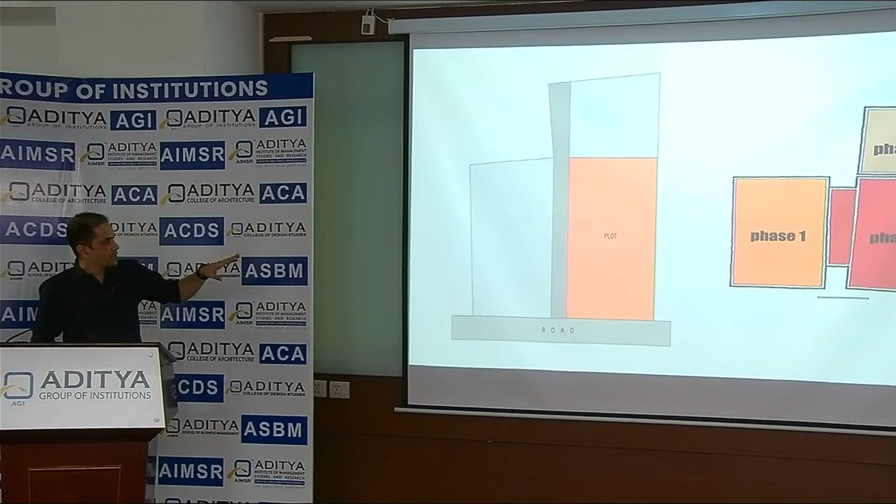This was a project initiated by the Chief Minister of Goa, Mr. Parrikar. There was an existing market, and his idea was to demolish it and build a proper market with proper infrastructure and more space to expand. If you see on the left, the orange rectangle was the plot where the existing market was, and he wanted to give them almost 30% extra space for future expansion.

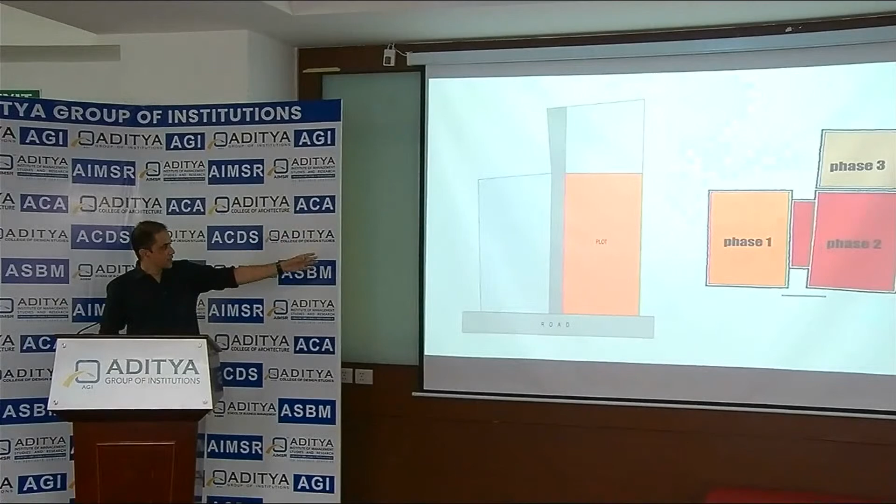So they decided to take up the plot which was on the left, in gray, and also take up the lane which was separating those two plots, as well as the plot behind.

The initial idea was to build the market in three phases. Phase one was built on the left so the existing market wasn't disturbed. Then the plan was to shift vendors into the new market, demolish the old one, and build phase two. Phase three was for fish and meat, while the first two were for vegetables and other things. It seemed like a good plan, and considering I was getting twice the amount of space, I thought it could be a nice market with good spaces.

But when we did the vendor count, we realized there were a lot of people who had been setting up shops in the corridors outside the market—it was like a slum. So everybody had to be given proper space; it wasn't just shops being transferred, it was people all over. Once you start giving them proper space of a minimum size, they started occupying a lot more than what they were occupying in the existing market.

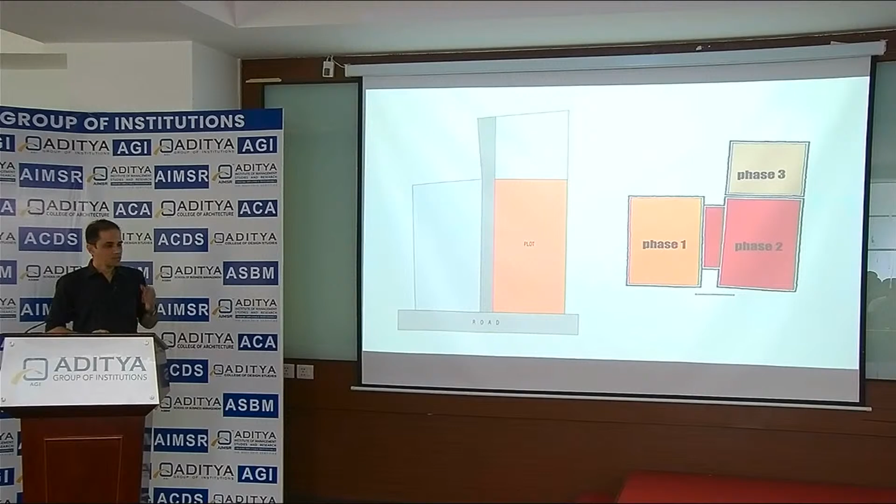So my initial thought of having just a ground story structure with courtyards, since this was supposed to be a vegetable market, I realized was not possible. We had to consume the entire plot for the building—there was no way to have pockets in between. Not only that, I had to go one story above, which was the worst thing for a vegetable market. There was no way to avoid the first floor. So all those initial thoughts of a nice low story structure with courtyards and sloping roofs were not possible.

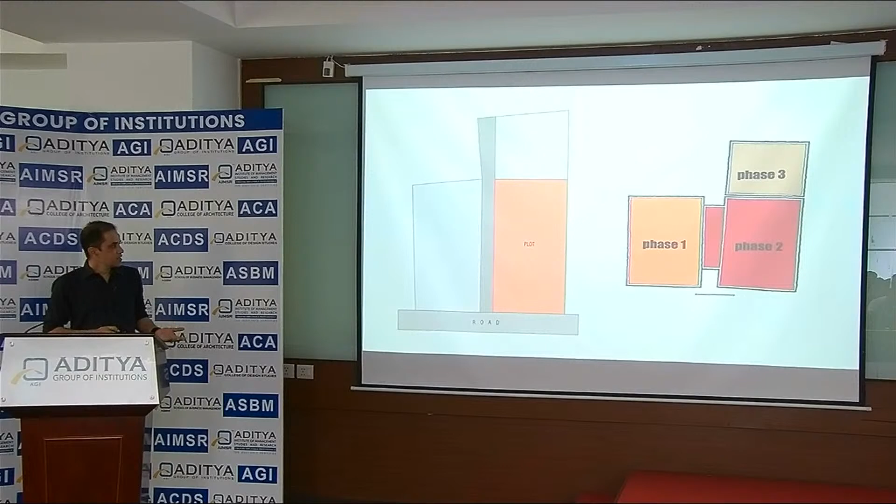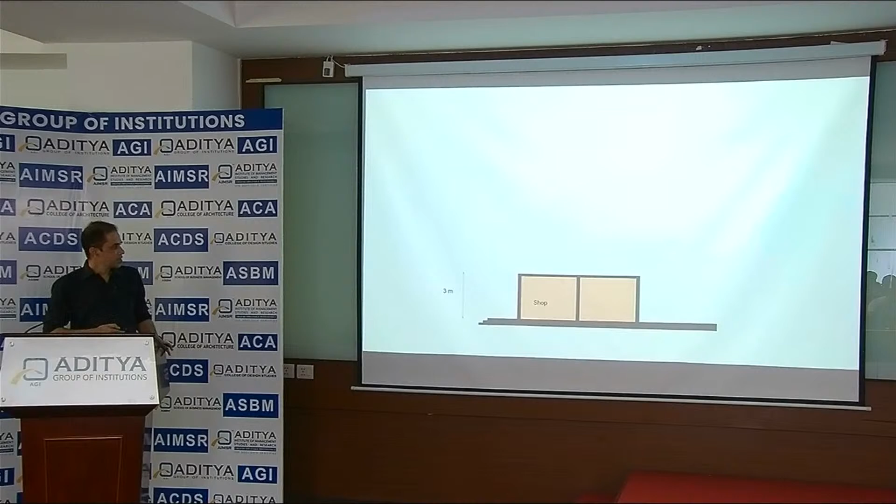Then came the second problem. These were the existing shops which had 3 meters height, and we had to give them exactly the same size. But they also had a mezzanine floor, another 2.5 meters. Which means my first floor was going to be 5.5 to 6 meters above the plinth level, meaning they had to climb up two floors to reach the first floor.

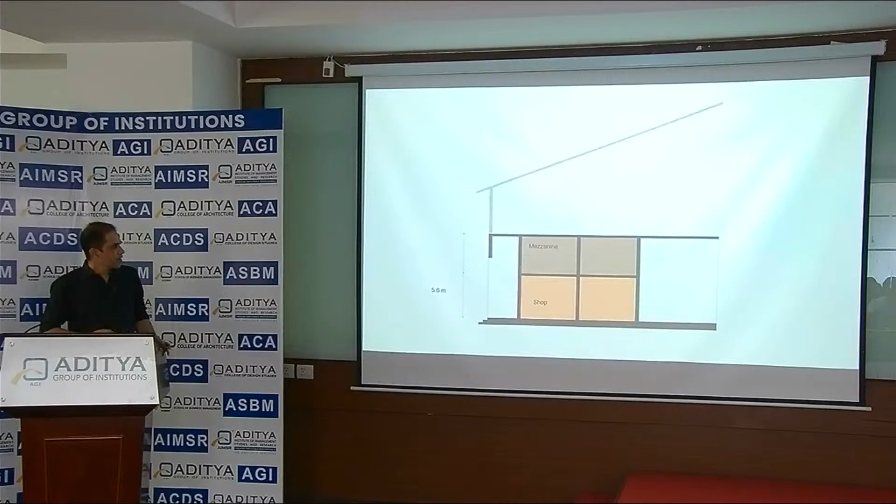It was not just 3 meters, they had to climb almost 6 meters to go up. So who would really climb up? There were no escalators, nothing. So I was sure this was going to fail. And if you see from outside, even adding 3 meters for the first floor, my frontage would have been like 9 meters before the roof starts—the eaves bottom would be around 9 meters, meaning it was a huge building.

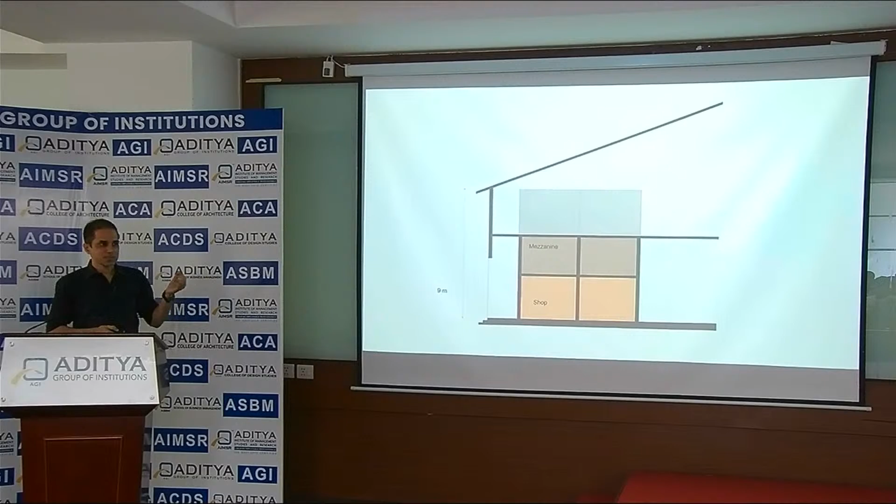It was like a monster building with a giant roof in the middle of Panjim city. So the first thing was how to bring the first floor down, how to connect the ground and first floor. That was the first issue, resolved this way: after the mezzanine floor, we dropped the slab by about 2 to 2.5 feet, giving us 3 or 4 steps, and then raised the ground floor as you enter to a certain level, almost midway, so the difference between ground and first floor became only 3.6 meters—so at least you feel you're climbing only one floor.

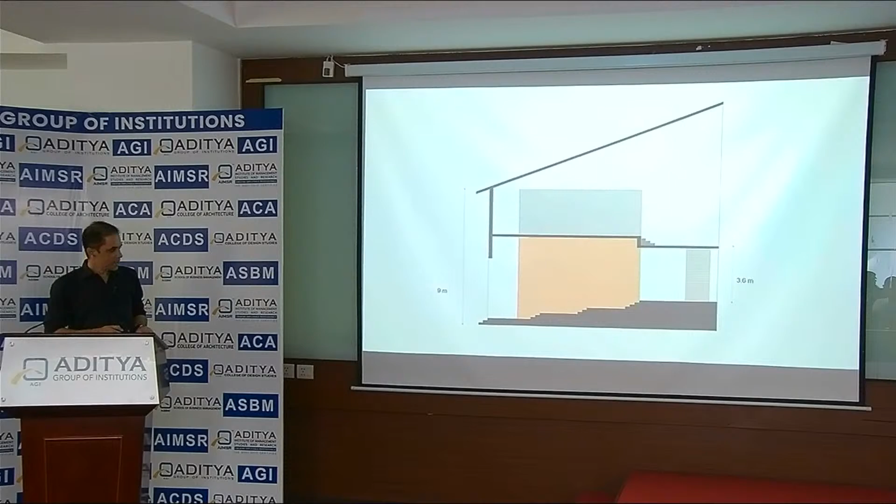This is how we solved that first problem of level difference, which was almost like two floors—solved in the section. This is how the plan looks now, because we had to leave a lot of setback space for trucks to move around for loading and unloading. There were other services like generators on one side, and the fire engine had to be able to go all around.

So the footprint was reducing considerably, and I had to use the entire footprint to fit in all the shops and the platforms. What you see in orange are the shops kept along the edge, and the central portion is where the open platforms are, where they sell vegetables.

The people on the first floor were not really connected with selling vegetables - they were selling plastic, or were tailors, or selling books, all kinds of people. They were shifted to the first floor so that all the perishable goods were kept on the ground floor, making it easy to unload and remove them. So this is how it was done.

Also, there was a road in between which acted like a shortcut for people from the city to go to the edge of the city to catch the bus to other places. It was like how people get down at the station, come out, buy vegetables, and go home - it was something like that for them.

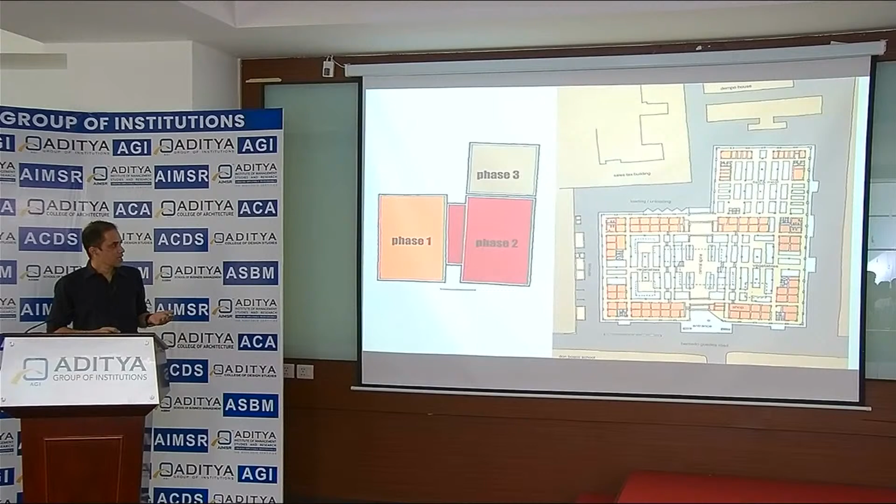And the rest of the building is very simple. It's just a grid of 6.5 meters by 6.5 meters, which was the most economical grid for a metal truss, used to cover the whole building.

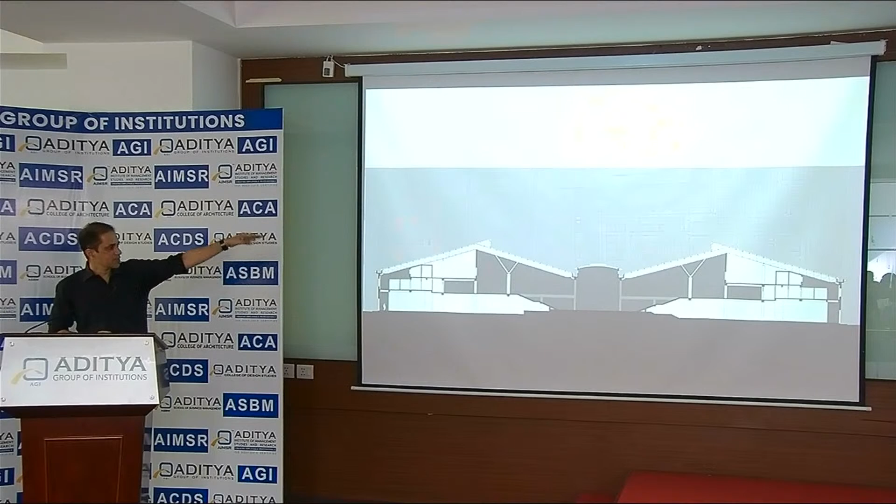This is how it looks in section - that's the central aisle where we have a skylight so that you feel like you're walking in the open. This is the building, this is phase one, and that's phase two, and that's the staircase which connects, just climbing up 3.6 meters.

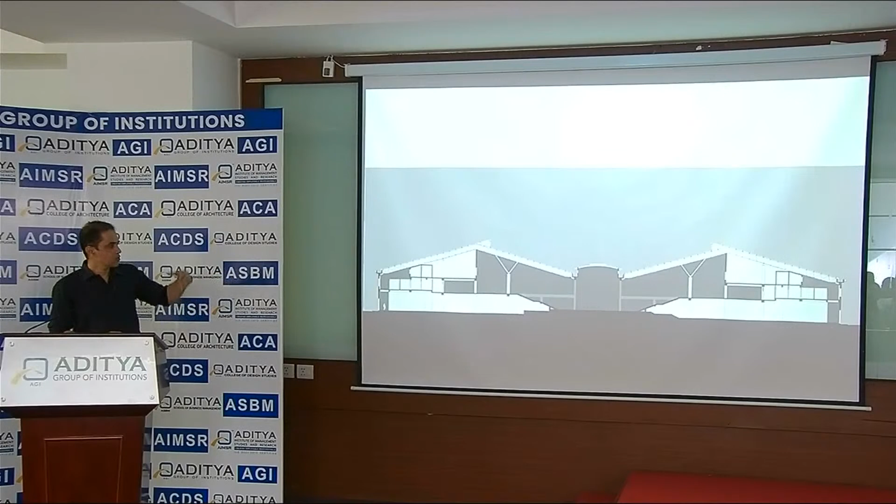The first floor was kept sort of behind - it's not occupying the entire ground floor, so there's a lot of open space, and you can actually see what's happening upstairs as well as downstairs by standing in the middle aisle.

So the section turned out to be very nice because of something we tried to resolve - the problem of the shops and the mezzanine floor.

The second thing was, coming back to scale - the building was 9 meters in height from outside before the sloping roof started. So I wanted to bring the scale of ground plus one, if not physically, at least visually.

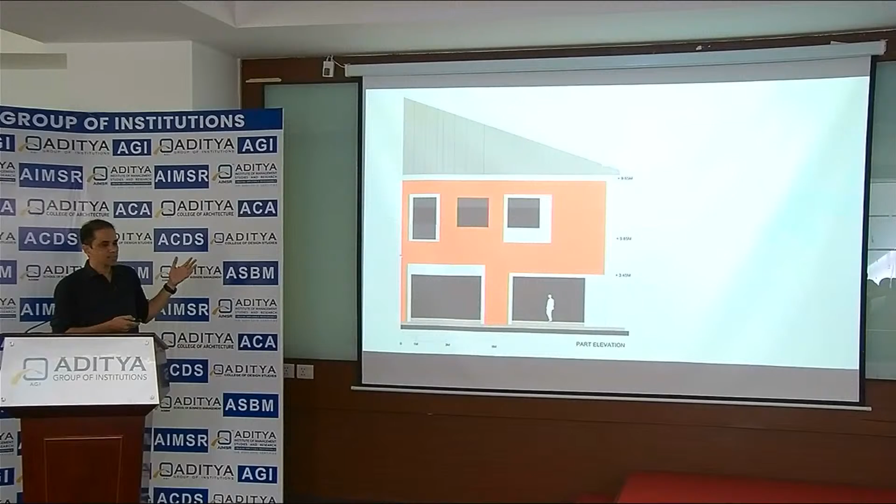So by putting that border, fatter on the bottom, it helped in reducing the gap between the openings. That played a major role in this elevation, and also made the building look a little different, in the sense that some variety is happening, even though the openings are very standard and straightforward, just in one row, not going up and down. But the border helped in creating some interesting element on the facade.

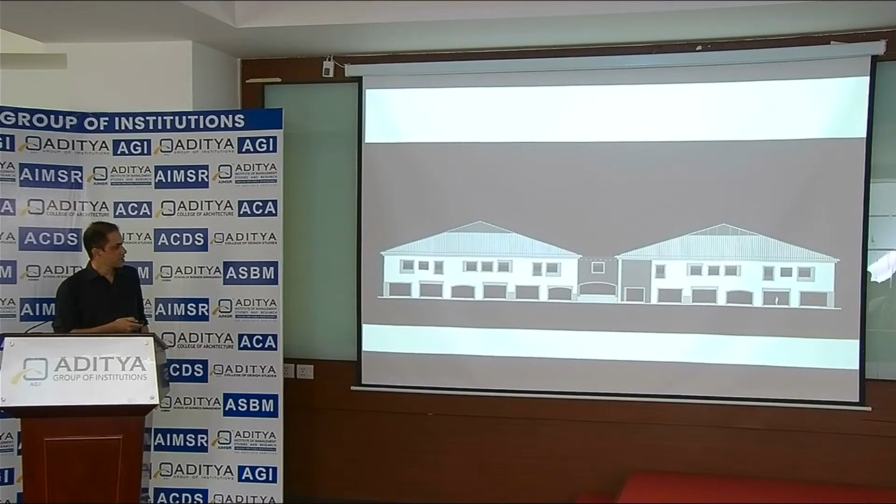So this is how the buildings look. That's the ground, that's phase one, and this is phase two. I also created a gap so it looked like two separate buildings. The central portion is the aisle you take to enter the market, also used as a shortcut. These openings look as if they're going up and down, whereas they're all in a straight line—it's just the border doing that. We also painted them in two different colors so they look like two separate buildings. And this is how the building looks now that it's built.

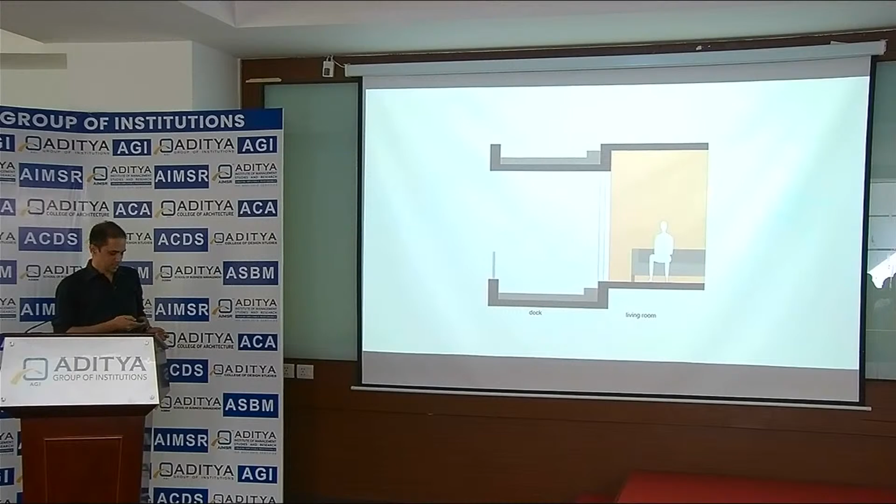Even for the bedrooms, we had a sort of planter outside so that people don't keep things outside, and we had drip irrigation for all these plants. I wanted all the plants to have white flowers at that time, and now it's no longer there—initially we started with white flowers, but then people have changed, and some of the plants have died. These are some things which we don't have control upon.

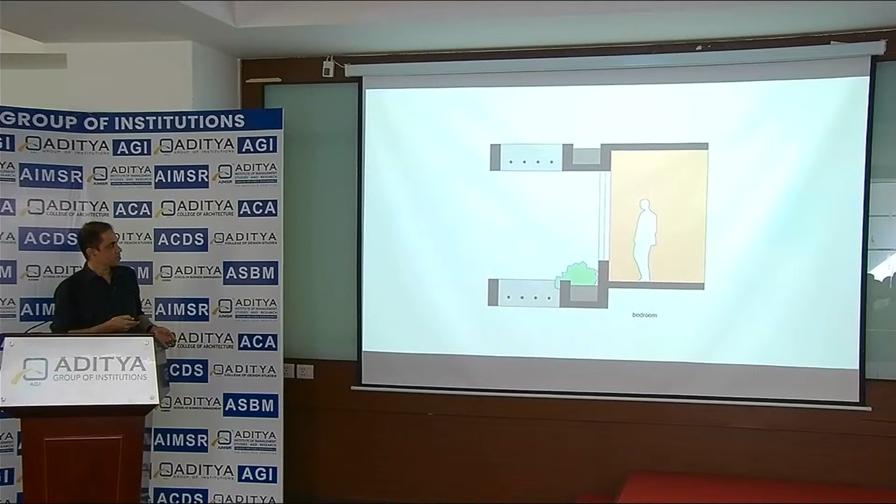The buildings were also kept at an angle so they have a better view of the sea, and that was the best part on top.

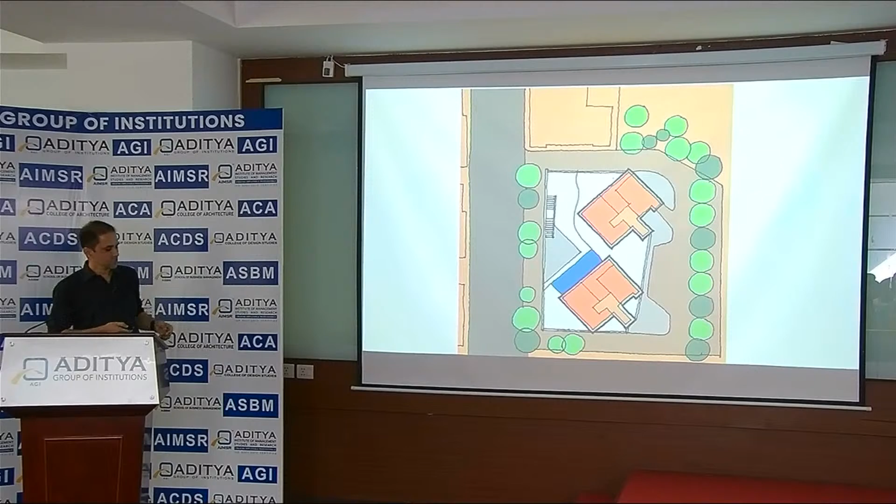This was one of our first projects, so we were really excited. We designed the brochure and everything for them free of charge. At that time they were all hand-drawn drawings, and that's the view you can see from the building.

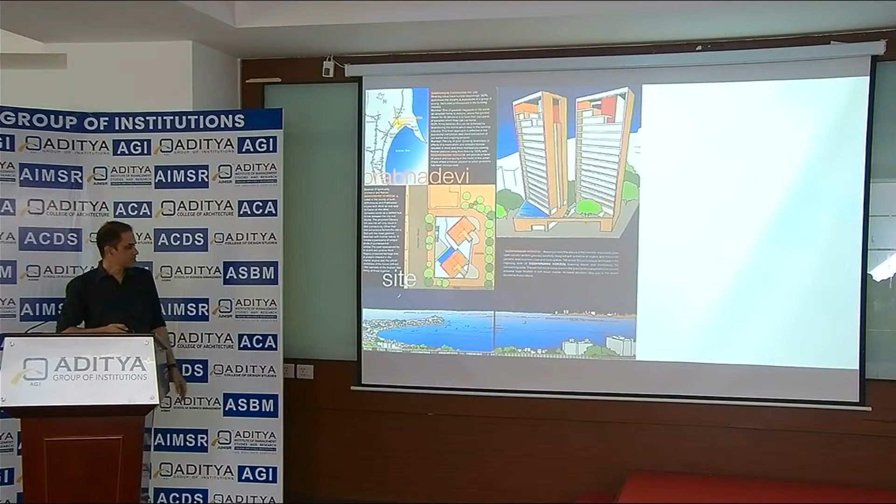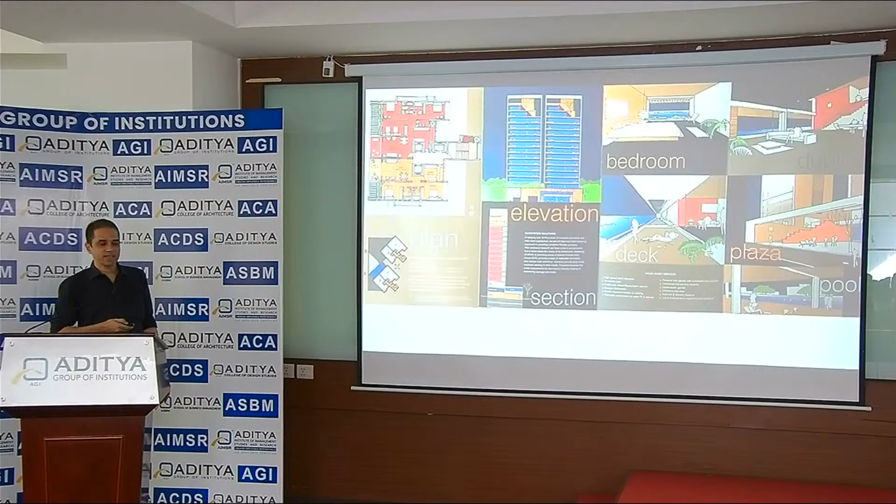The brochure was quite liked by people, so they had to print it multiple times because people just came and took away the brochure, and nobody bought the flat.

This is the building elevation when it was built. This is how it looks.

Now, what is important is I realized that when you're walking on the street, you cannot see a high-rise building because you never look up. What you see is at eye level, so that's just the first 3 or 4 floors, and there are also trees sometimes which block your vision. So high-rise buildings are not really seen when you're walking on the street. Only architects look up, I suppose, so the rest of the people just look down.

And in such cases, most of the bottom levels are used for parking. So you have 5 or 6 levels of parking, and all you see is just blank walls or screens, which again doesn't go well with the street, the context or the scale of the street. So I was very clear that it is important that we should have something at the lower level that tells you there are human beings staying here and they're not just cars. So the whole focus was on what is to be done at the podium level.

Fortunately for me, there were some existing shops which had to be given back, so we placed them along the street, and we also created terraces so there's some interesting level difference. You see some staircases going up, and people moving up and down. There's an arcade, there's like a little courtyard. So all this was happening at street level, which you notice, and you don't notice the building above. This I thought was very important, keeping in mind what happens on the street, what happens to the people walking on the street.

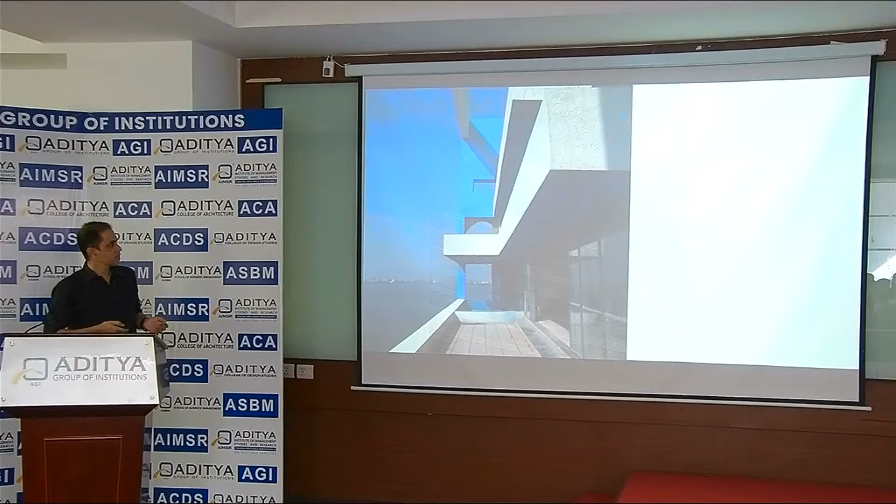Similarly, the penthouses on top were made to look like bungalows, or feel like bungalows, because of the terraces created upstairs. So the top floor was all penthouses, and that's how the building looks from far.

And those are the buildings over there. This was built in 2004 or 5, and they were quite tall at that time. But nowadays, probably there are much taller buildings all around, 40-story buildings all around. But at that time these were considered quite tall.

The third project is actually a small building compared to this. It was just a lab-cum-office space for a cement factory, and these people were producing something called microfine cement, which is used for bridges and all that. It was the first of its kind during that time. So they wanted buyers to come to their factory and understand what is microfine cement. They were expecting to export this, so they were expecting a lot of people from abroad to come here.

This entire factory was built by the engineers, and there was no need for an architect here. They had this tiny plot right in front, which of course they were going to design. Then somebody thought, okay, we should hire an architect to do this small building because we are expecting people from outside and it can't look like this. So they called me.

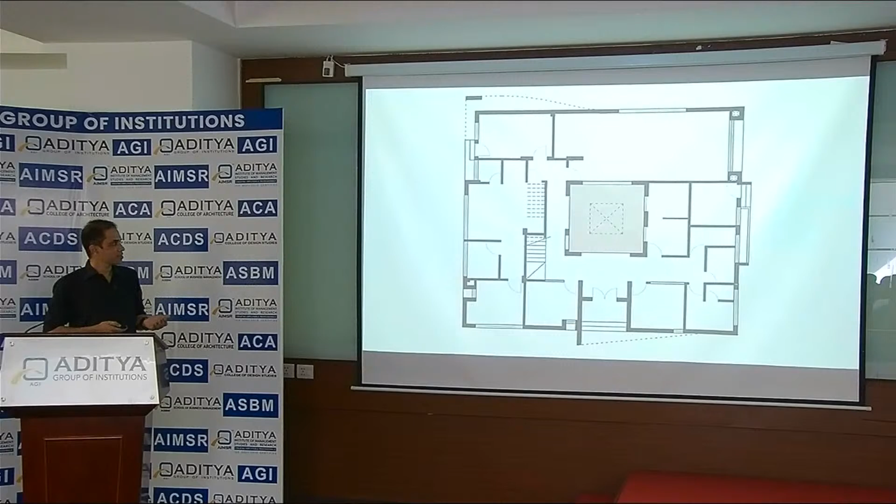I looked around and saw that everything was gray and looking like a factory, filled with cement powder. So what we really needed was something that would stand out in this whole thing and grab your attention. If you see the requirements, there were hardly any - just a lab and a few office spaces and cabins. It was a very small building, and there was no way we could have a courtyard inside because there's a lot of dust flying around. So this is an enclosed space, like a small pocket in the center, but it has a skylight on top, and everything revolves around it.

I decided this building cannot remain a ground story building, because though I love ground story structures and every time the attempt is to keep the height low, this was a time when I thought it needs to be pulled up. The reason was that if you see the surroundings, there are all those sheds and things happening around that are much higher. So we thought it should be at least in line with the shed next to it, so it sort of has a presence, which was what they were looking for.

In order to do that, we had to place a few requirements on the first floor and even on the second floor, like the conference room was kept on the second floor at the back. The water tank came right at the corner as per Vastu, because that was the place it had to be kept, so it was brought to the front. And in this case, the building had to look sculptural, because everything else was pretty straightforward.

I thought this should look like some sort of a jewel in the whole thing, and it should be painted red so that it brings in some light in this surrounding. So it was a little red building placed there, and it has windows, but they're not one above the other because that would give away the height of the building. So they are staggered or indirect, so you don't realize the total height of the building or how many floors there are when you see it.

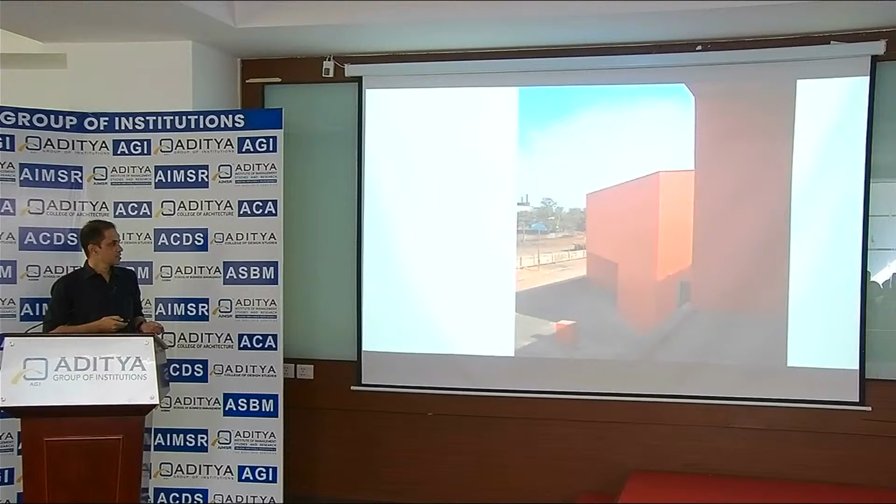The next project is Mustifund School in Goa. It's basically a school, and the government had suddenly decided there's too much congestion in the city, and we should shift all the schools outside, on the outskirts, which is not very far, just 4 kilometers. They gave plots to 5 schools who did not have a proper space in the city, no proper playground, for a very nominal charge, and the schools had no choice but to shift.

But the plot they gave them was something like 50 meters by 200 meters, and the level difference is like 21 meters, which is like a 7 story building. This could have been the worst plot for any school, because how are you going to have a playground? The slope is 1:4, which is quite steep. But they had no choice, and this was the only piece of land available on the outskirts, so they all agreed to go for it.

Initially I thought it would be difficult, but then we came up with a solution, and now I'm thankful they gave this plot with such a steep slope because it really helped us in designing the building.

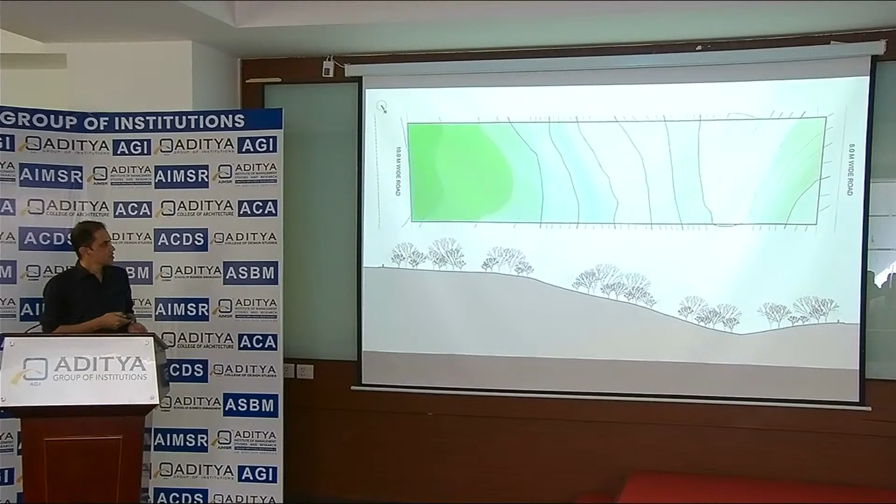This was the plot when I went to see it. It was like a jungle, and you could hardly go a few meters inside. So we relied upon the contour survey which was given to us.

When children go to school, usually they start at the age of 4. They're very small, and that's the first time they're stepping out of their houses all alone, and they're really scared. Most of our school buildings, especially in Bombay, are like huge buildings, so they're very intimidating for the child, and they don't really like where they're going.

So we started off with the size of a classroom, and since the school had to build this building on their own with no help from the government, they were all depending on donations and things like that.

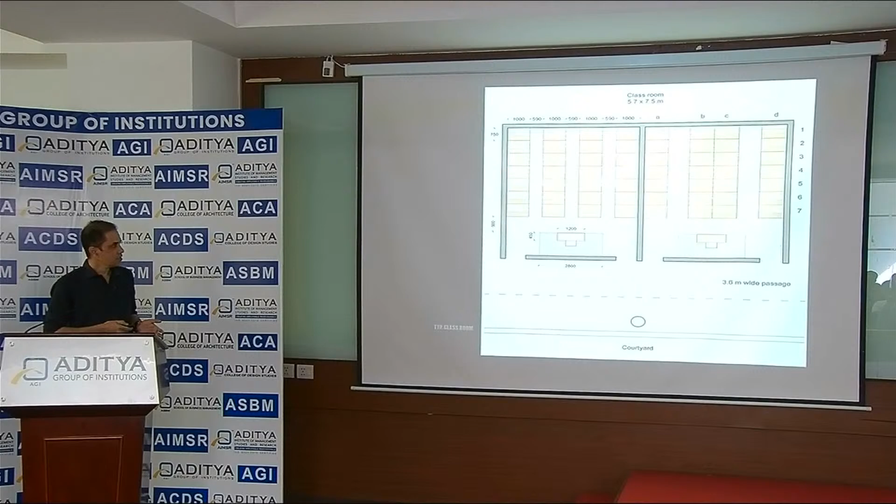So the classroom was designed first. Then the classrooms are placed around the courtyard. Considering that we had only 50 meters width and leaving 6 meters on both sides, whatever was remaining in between was used as the width of the building. After placing the classrooms, we took the corridor as wide as possible, and then we got the size of a courtyard, around 16 by 14 meters, which is ideal for a ground plus one structure. That was the minimum size of the courtyard I wanted, and we could get it.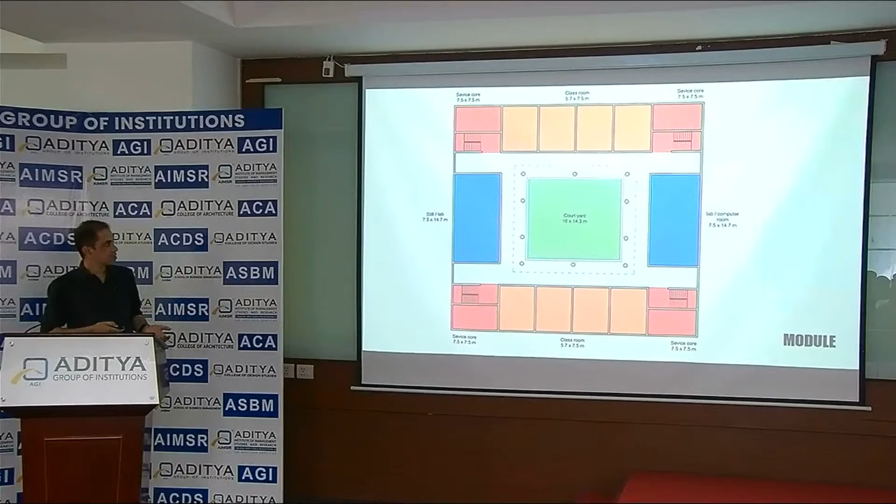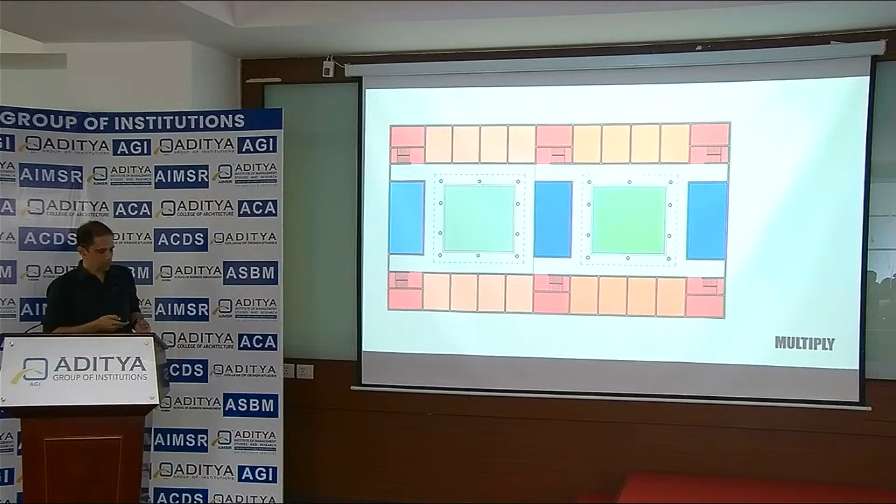Then this is how I could multiply it, and you realize that the in-between part is overlapping - the red portion and the blue and again the red, they are overlapping. So if this was the first module, the first courtyard, the second one was overlapping so that the staircases connect and you can walk down to the next courtyard, next level, and then the third. So the building was in a stepped manner, which actually went as per the slope of the site.

The good thing about this is when you enter the school from the top, you think it's a ground plus one structure, because when you're in the courtyard, you see just a ground plus one structure. When you reach the end, you see there's another courtyard below, which was quite a surprise, and you don't realize it when you enter the school. And when you go down to the next level, again you think it's a ground plus one structure because you don't realize there's a third courtyard below, or the courtyard up there.

So at least three sides look like ground plus one, and the same thing happens when you're in the third courtyard. So the scale was maintained in all three courtyards, and even though altogether it's like 6 floors, you always feel you are in a ground plus one structure. That was the whole idea which seemed to work on this plot, and we also got flat surfaces for children to play and all that.

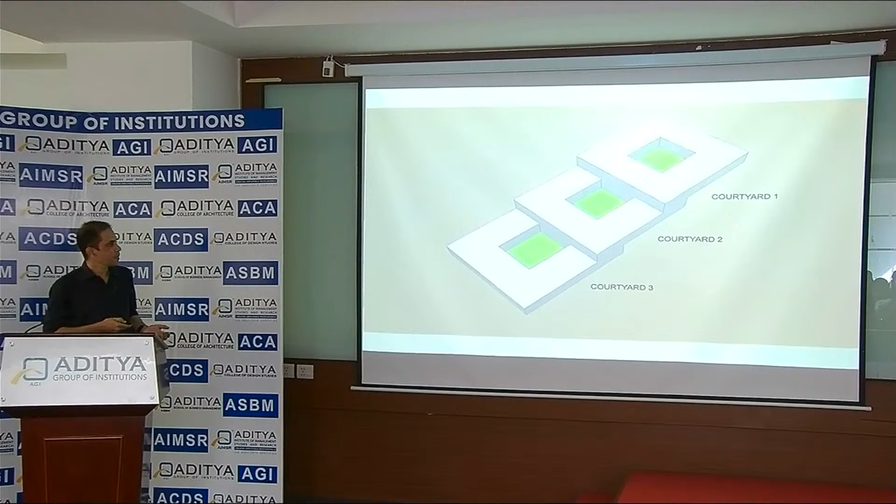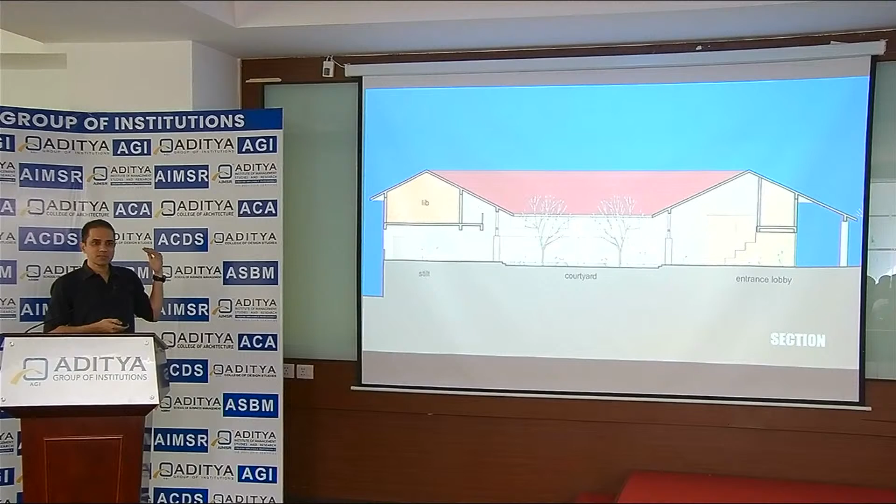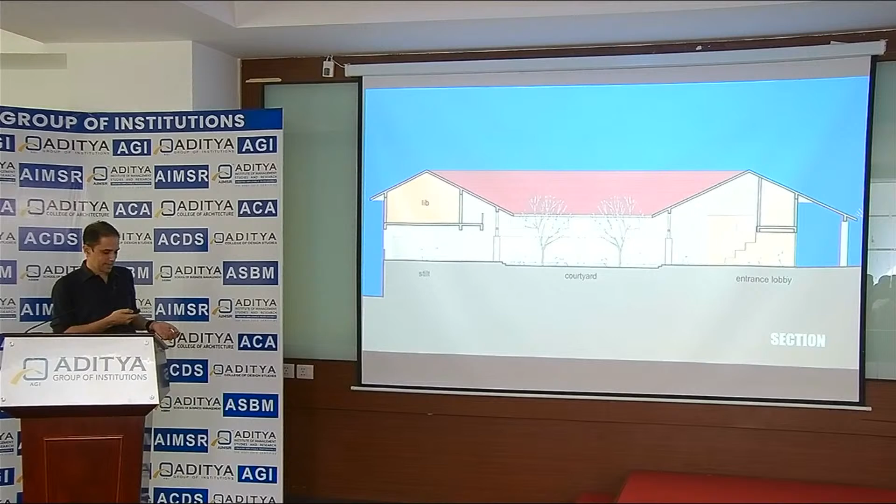In some cases, we have kept this part open, written as stilt, so that from the stilt area you get the breeze flowing through the courtyard and right out. Also when you come to the end, you can see the next courtyard at the next level. It's a very simple building, but keeping the scale as ground plus one has made the school look different from the other schools, because the schools next to us have built a 6-story building right at this level, and in the remaining area have stilts which they don't know what to do about. They've just considered it as flat land and built high, whereas we have gone down.

These are some views of the school done by a student. This is the entrance court where you enter before you enter the school. There are two wings which have all the admin, the offices and all that, so parents don't really have to enter the school but can straight away enter the offices, do their work and go out. Also when the buses come to pick them up, the children can gather in the front courtyard, the front open space, before they get into the bus, so they don't stand on the footpath.

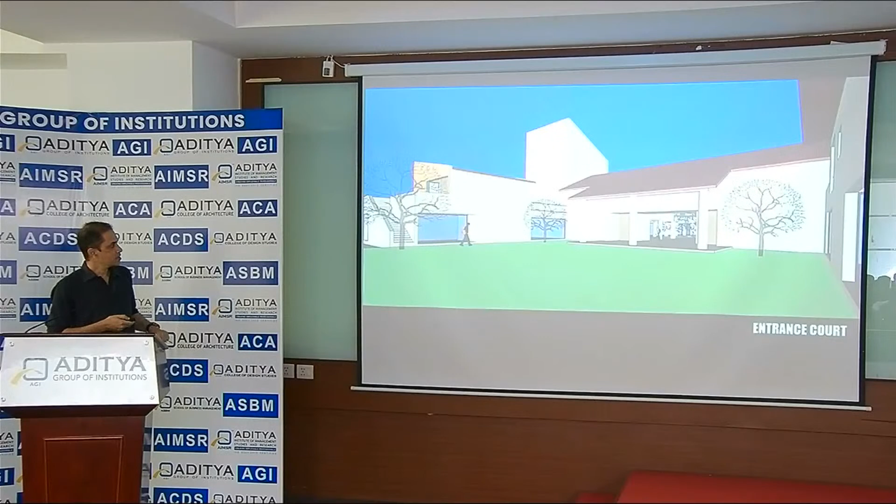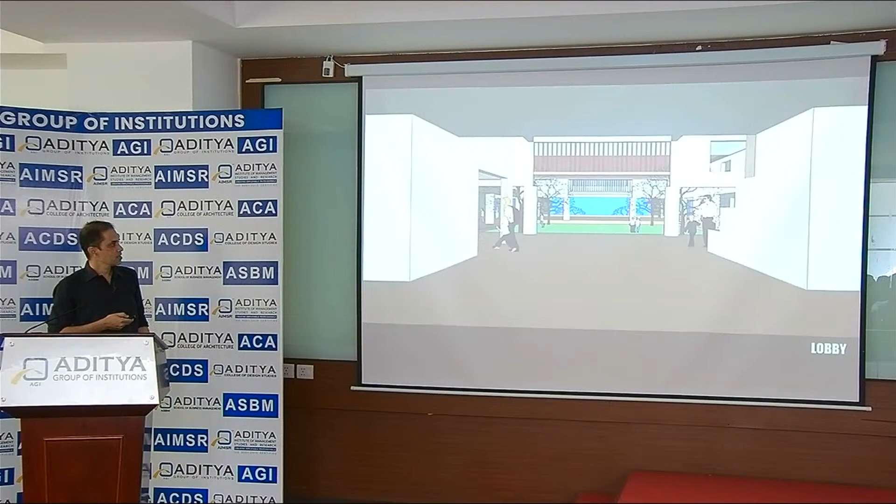So this is where you enter the entrance lobby. There's not like an enclosed lobby, more like a stilt area, and that's the back which you see. It's all open, so you can see the next courtyard, which is two levels down. That's the size of the court, which is 16 by 14 meters. It's very nice for a ground plus one structure.

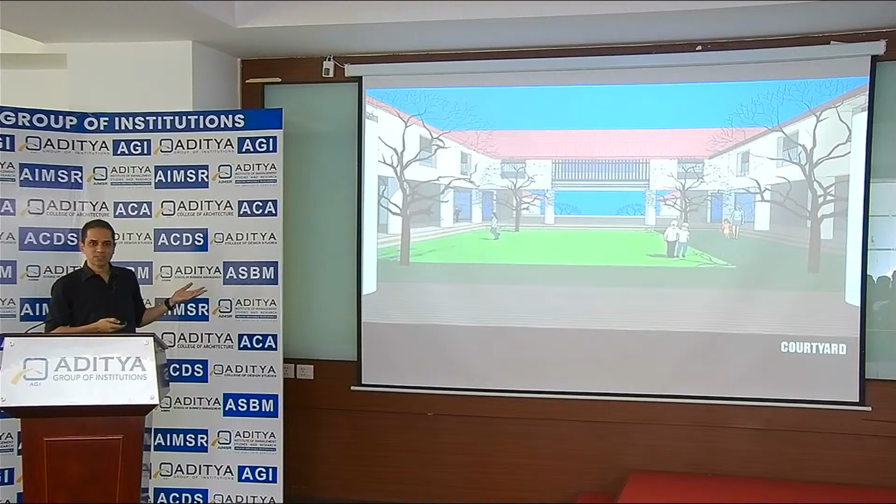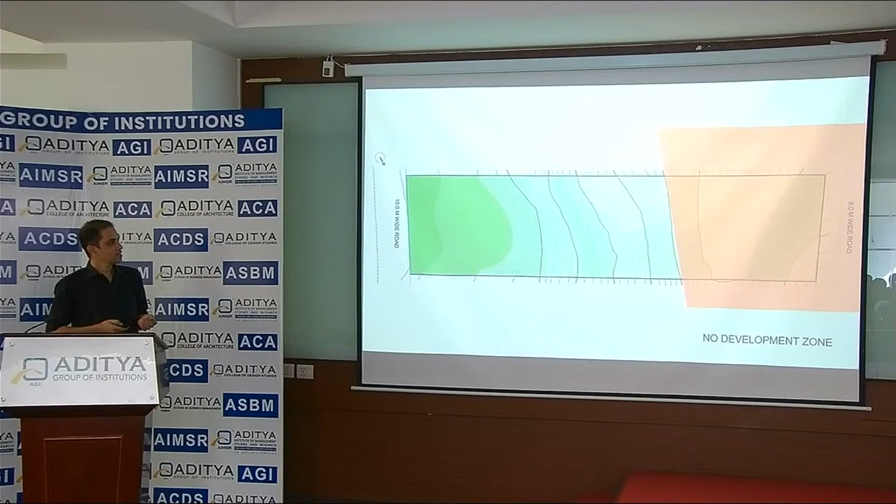Now this happens in real life. So when we designed the school, we were all very happy and excited about how this thing was cracked, the whole design problem was resolved. We had started making the working drawings, and then suddenly we were told one day that there's a line passing through the plot, and it's a no development zone, you cannot build in that area. This orange patch takes away almost 25% of the plot, and our third courtyard was overlapping into that area.

So the client said, 'Oh, you can't build.' So we said, 'The government has given you this land, and of course they should have known that there's a line passing through this plot. How can they just give it to you like that?' So we thought, okay, we'll go and convince the chief minister, show him the presentation, and tell him how beautiful the school is and how it works, and maybe they should shift that line just a little outside, because it's just an imaginary line. What that line said was you cannot build on a slope which is more than 1 is to 4, and our entire plot was actually 1 is to 4. So that line did not make any sense. It was just drawn using Google Maps or something.

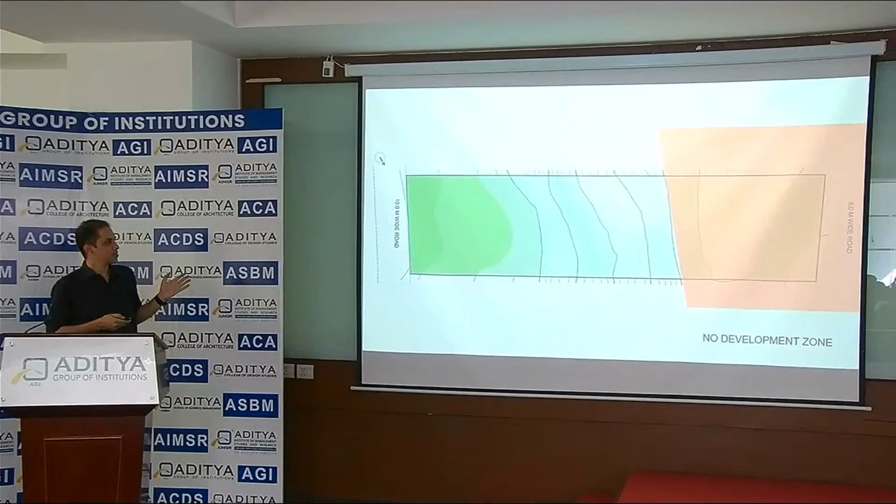So ideally this line should have been here somewhere, since the entire plot was 1 is to 4. Since it's somewhere in between, why not shift it outside? But the chief minister did not want to ruffle any feathers, so he said no, let it be. What I can do for you is make the plot wider. So he shifted the other schools a little bit to the left and made our plot wider, which meant we had to redesign the school.

After convincing ourselves that this was the best solution for a school, the way it was designed, it was very difficult for us to come out of it. We were in a state of shock, I would say. But we had no choice.

Now the plot had become wider, and we had this wonderful concept which was getting disturbed because we did not have the length. What we did was accept what it was, so instead of having three courtyards going down, we have two courtyards now side by side, and the next courtyard is again down there. So it became a basketball court now, as big as a basketball court. And then the third courtyard is not actually a courtyard, but it became an amphitheater because that's where the plot ended.

So the first level is used by KG to fourth standard children, that's the primary. Then fifth to tenth are on the second courtyard because they can walk down on their own, so they were kept on the lower level. And then 10th to 12th were kept on the last level so that they can use the amphitheater.

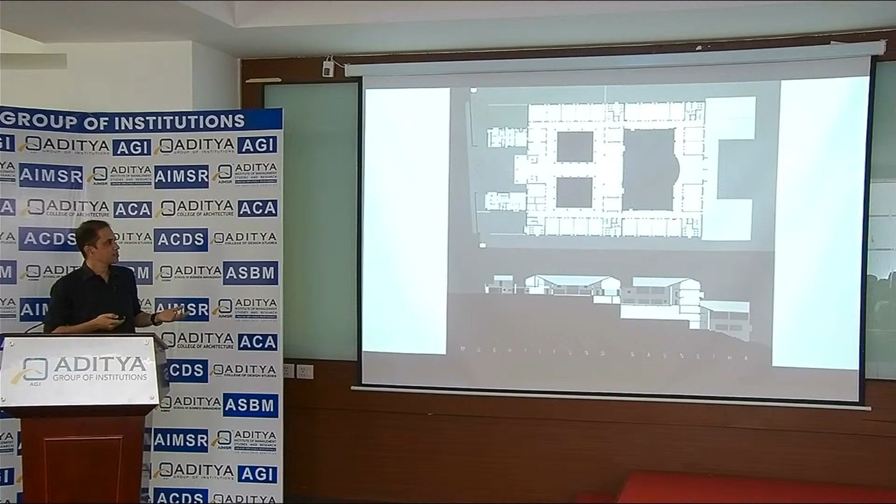So it still works, I mean we could sort of save the concept. It's still not that bad, I would say. And we made it work instead of just changing everything.

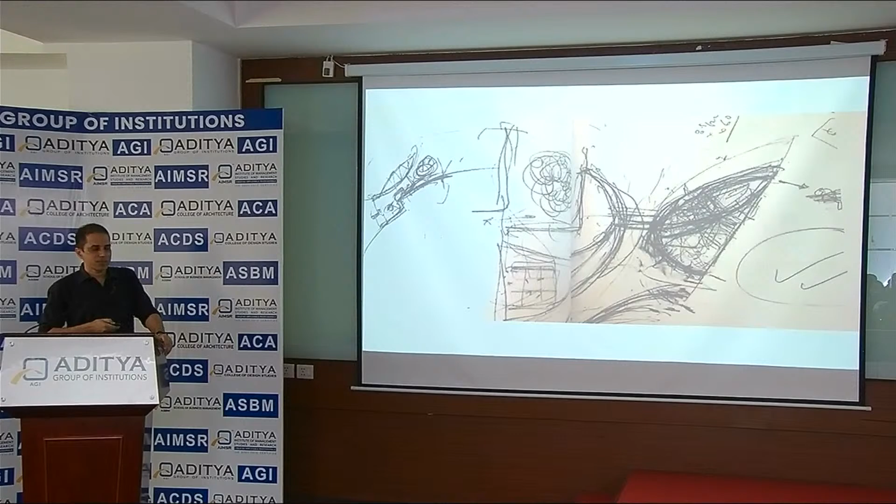This is the last project I'll be showing you, a cancer hospital in Lisbon, Portugal. Around 12 years ago, Charles Correa had designed a building, a cancer research center, which is a beautiful building. I was working as his associate for this project. I worked with him for 18 years, and this was the last project we did together. It's a very nice, very powerful building, a very strong form, on a triangular plot, with the Atlantic Ocean right there.

There are three buildings like this, and it's basically a research center.

Three years ago, the same client sent me an email asking if I could design a hospital, a cancer hospital for pancreatic cancer, to be built right next to this building on the same plot. There was a little bit of area left on the right hand side which was used for parking, and they said we want to build a hospital there.

When you're designing a building right next to a masterpiece like this, designed by somebody like Correa, you have to be very, very careful. Your building is going to be compared with the rest of the buildings. It's not that you want your building to look better than this — it's more important that it should look as if it was always designed with the rest of the building.

The only difference was that it was built 10 or 12 years later, so it should look like that. Now that it's built, nobody would realize these were built separately. It was very important that we use the same material palette and maintain the scale of the building, since these were not more than ground plus 3 or 4 stories, and the language had to be the same.

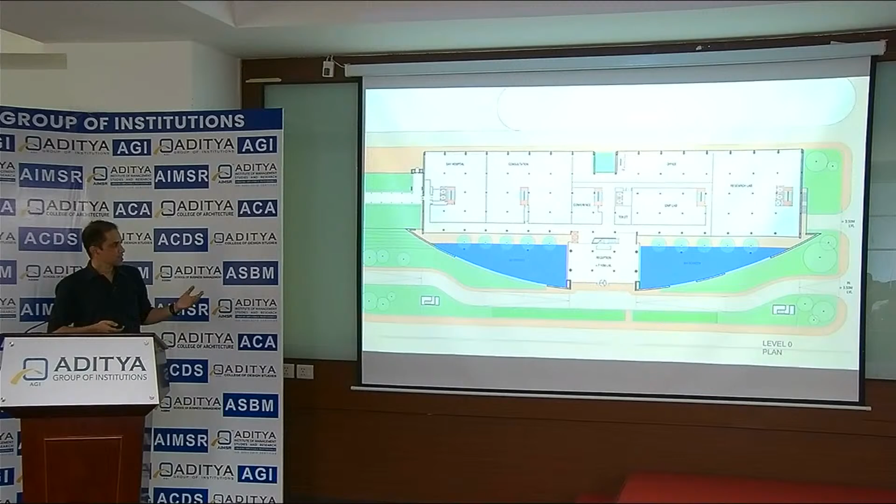So we have two large courtyards with a water body - a shallow water body. You enter the lobby and see water, walk around the hospital, and everywhere you get a vision of the water. You can actually step out and sit under trees right next to the shallow water, because the weather is so beautiful, so while patients wait for consultation or day hospital, they sit outside in the sunlight, which is very useful, waiting to be called in.

Similarly, on the other side were the research labs, also very close to the water body, and people take a break and come out and sit on that side. So in a way it was helping, and this entire building was raised by 3.5 meters from the road level because we are so close to the ocean and the water table was very high.

So the ground floor is actually 3.5 meters above the road level, so we had to provide a ramp to climb up. You can see at the bottom there's a ramp which goes up and then down, hidden behind a straight wall with sloping landscaped area, so you don't realize that you're climbing up.

Below this is parking, which is actually at road level, and then we have another level of parking, which is the basement. So we have two levels down and another floor above this.

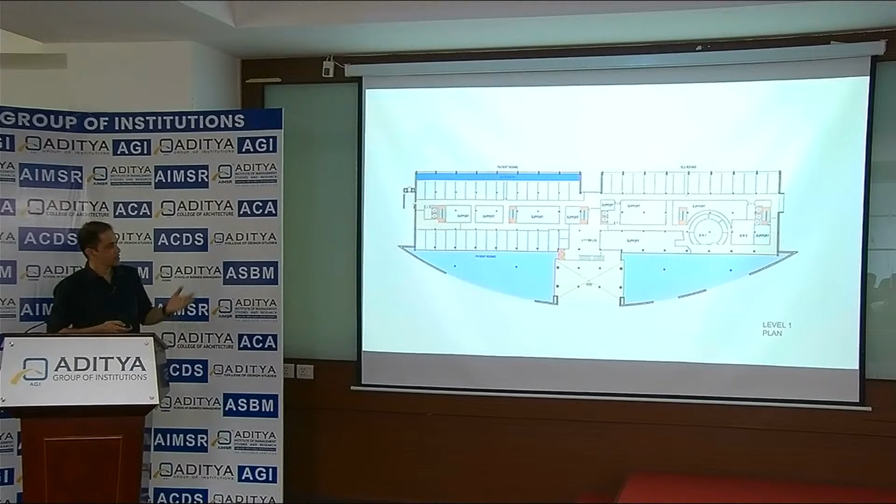And that's the first floor, where we have rooms facing on both sides. The rooms at the back had a water body at floor level, and some rooms could get a view of the ocean. These rooms look into the front courtyard, and we have the ICU rooms on the right hand side facing behind, and the ORs facing the front.

That's the final plan which was built. We had a US consultant who designed the internal planning, all the rooms and all that was done by HDR, which is a firm from the US.

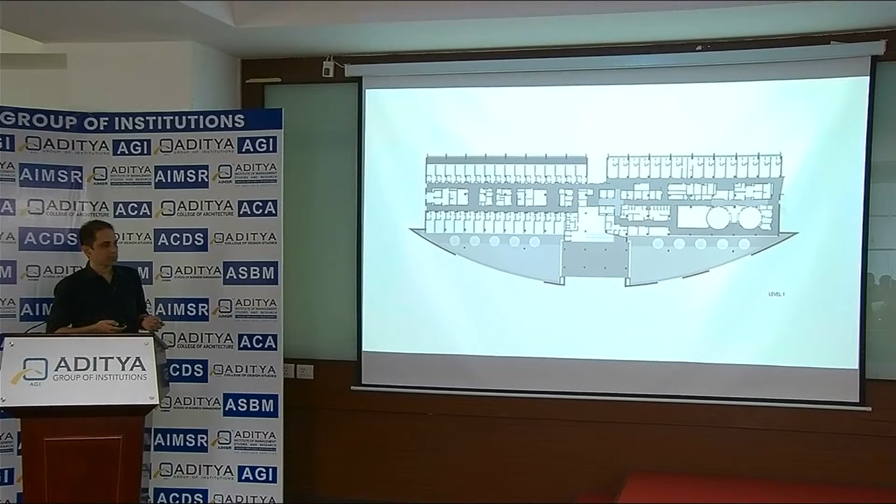Because they were experts in hospital planning. And that's the section which you can see: this is the basement, and then the second level of parking, which is actually at road level. And our first floor, or the ground floor, is actually 3.5 meters above the road level.

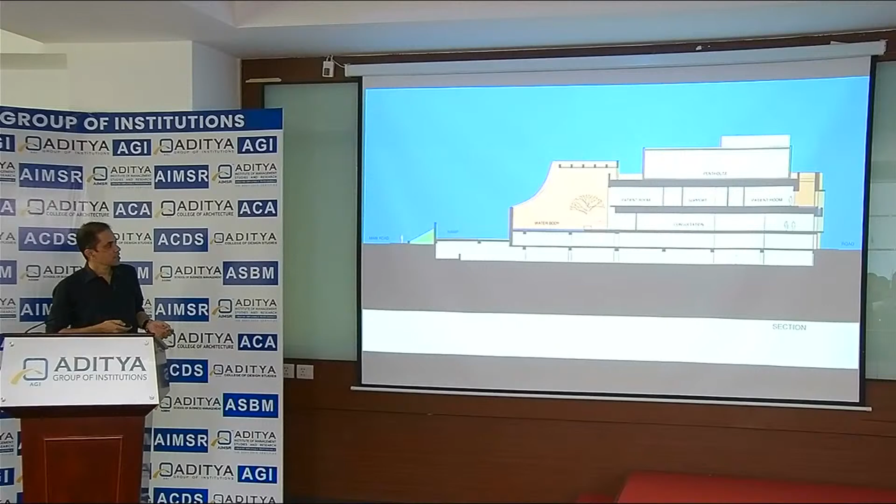And we have the water body, and then we have the rooms on top. And on the terrace, which is called the penthouse—not what we think of as a penthouse—it's mainly for services. All the air conditioning units and all are up there.

And that's the water body, and we had this curved wall which was actually giving it the privacy they wanted. First of all, they were higher than the road level, and they can sit there outside. And there were these huge cutouts from where you can look out and see the hill in front with all the houses.

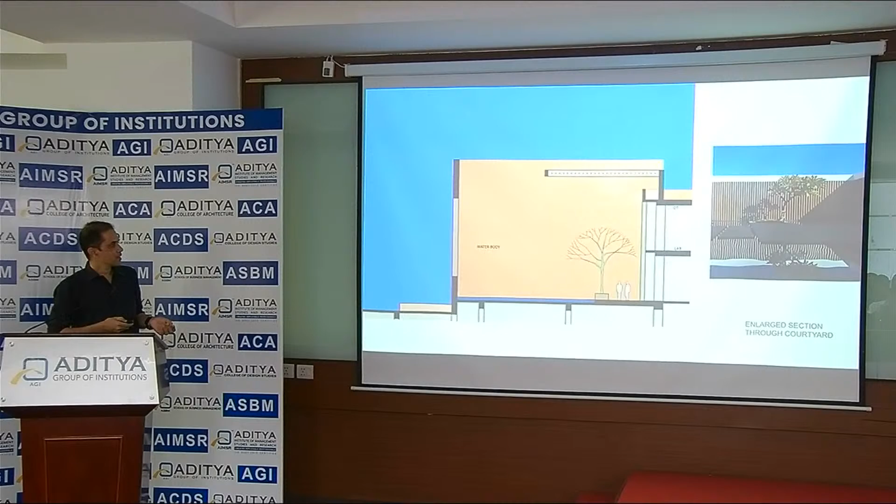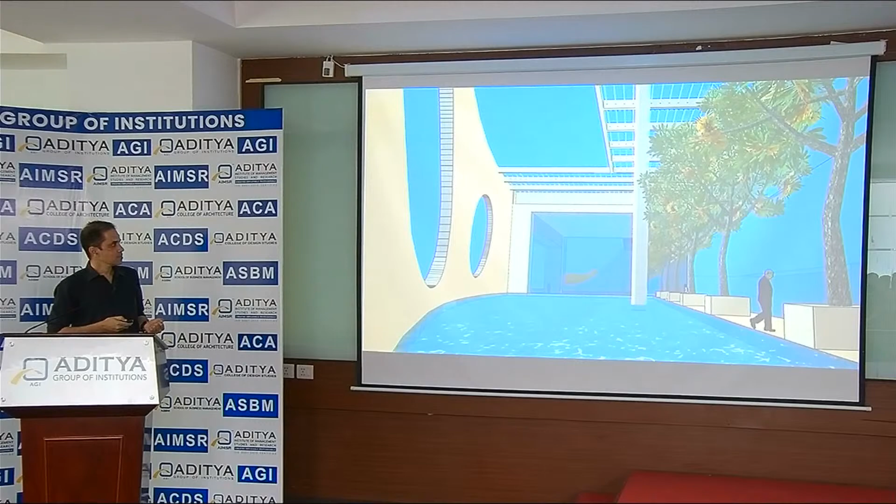It's something like this. And that's the reception lobby, which is at the back. And that's the patient's room with the water body, at the first floor level. The reception was like a double height space, and we had another lobby on the first floor if you enter the rooms.

And even here we have a big wall which is reserved for a mural. This is just a placeholder, not the actual mural. But I've suggested it should have something nice representing hope, because that's what people are hoping for when they come here—they have certain hope that they will be cured. They're still looking for an artist who can do something there. Right now, it's just a blank wall.

And that's the building from outside, which is like a 170-meter long building. It's very long, but it has this beautiful scale and proportions, I would say.

That straight wall in the front with the landscaping actually has a ramp behind it to take you up. Those cutouts help people look out, but they are not seen from the road level. You can see the size of a human being at the end over there on the right. So it's a very big building, but the scale is such that you can't make out the total height.

And these are some pictures. This was built during the lockdown, it got built in 2 years. They kept sending me pictures while it was being done, and I couldn't go. I haven't seen the building myself.

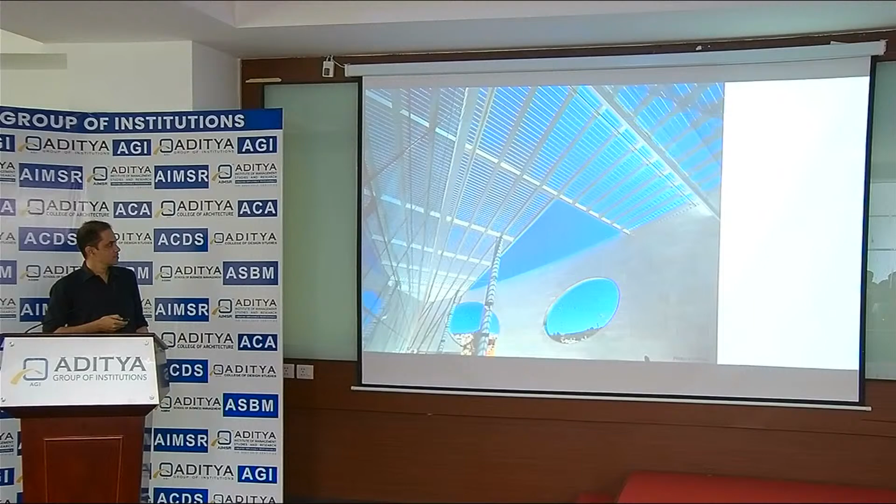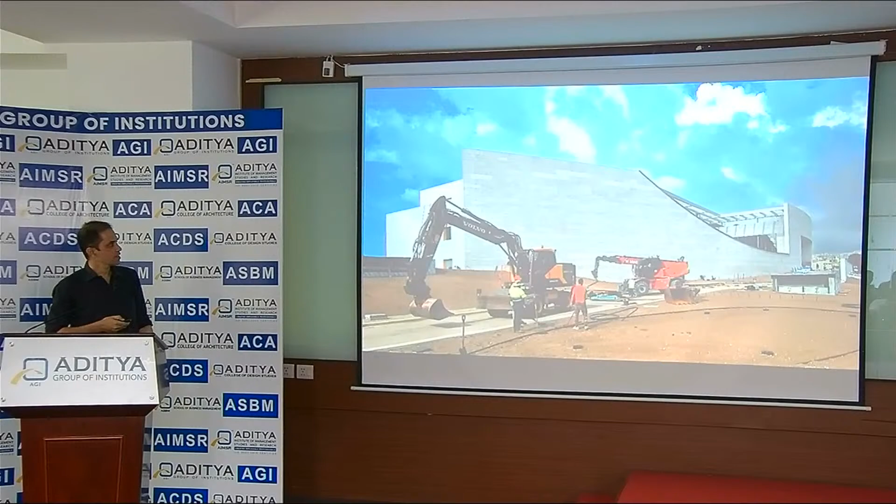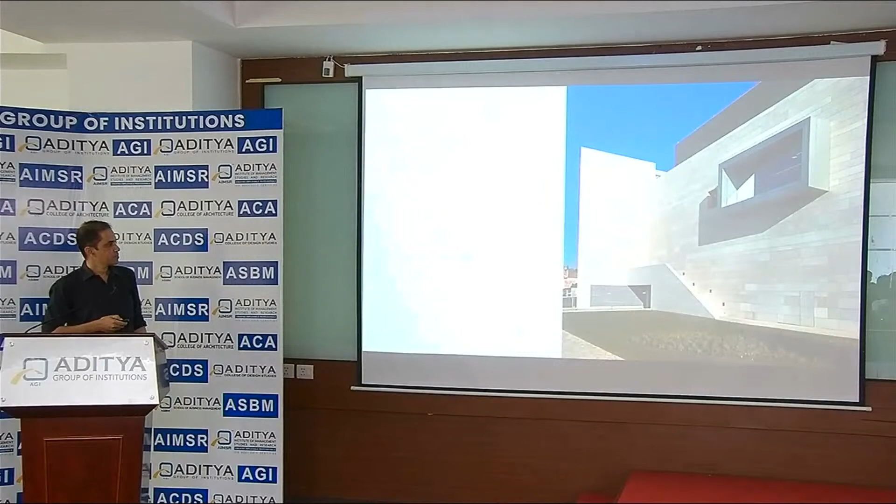I'll be ending this with a walkthrough, which was actually made by a student in my office. But there's a nice story. I think we have time, right?

There's a person who donated 50 million euros for this project. He was Spanish, and once we prepared the sketch design, we had to show him what we are doing, because after that things were sort of frozen. So this was the first time we were going to show him, and the first time he was going to know how his money was going to be used.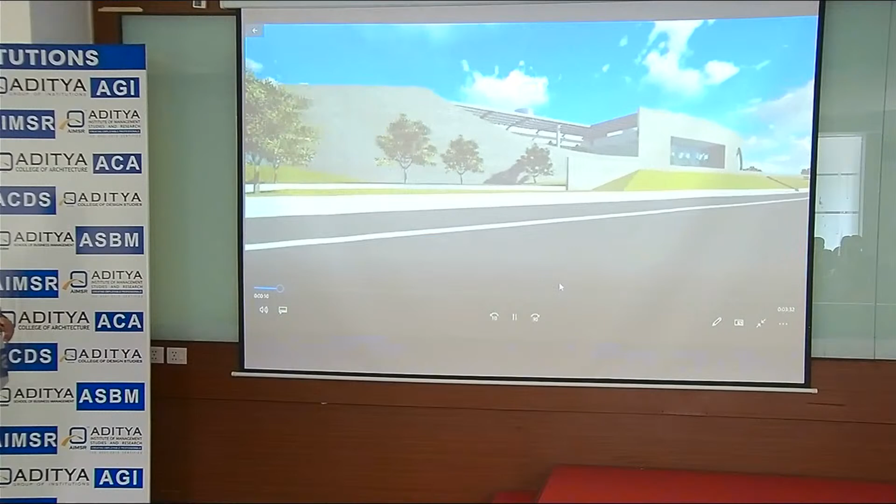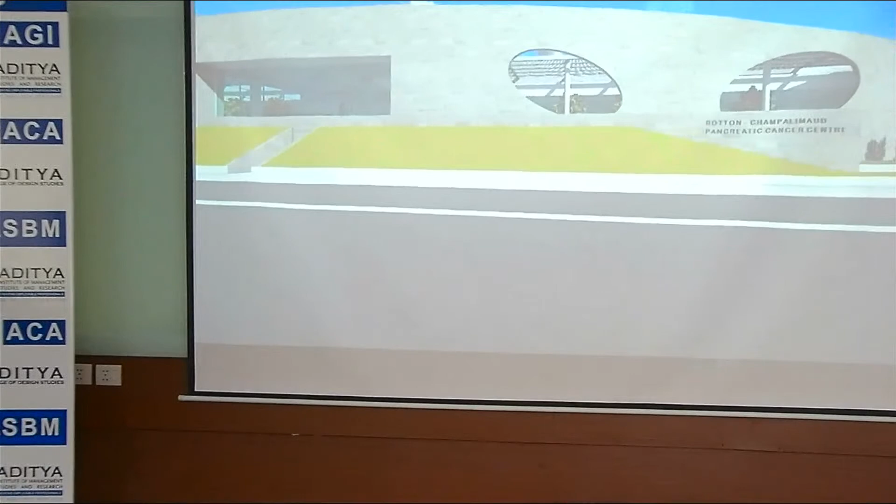It's not running. Actually, it was supposed to run on its own. Can you increase the sound? I think you should reduce the sound slightly.

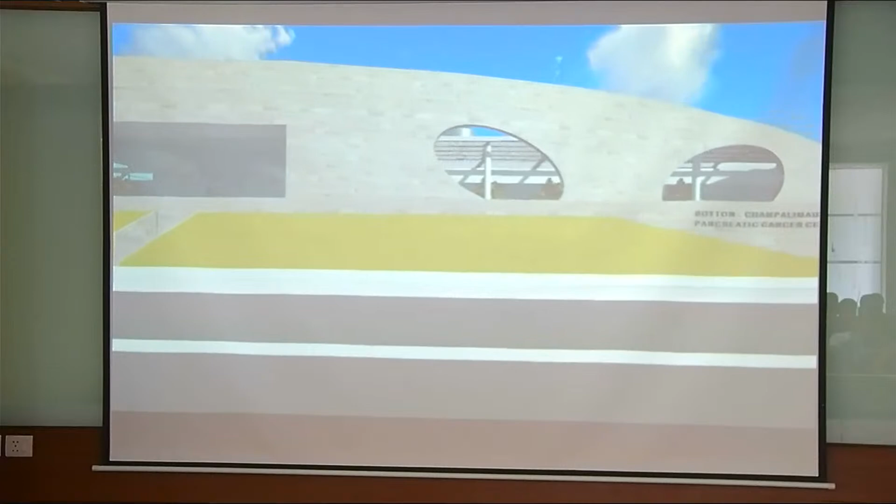During the lockdown, I was working on a book, and I basically wrote down all my thoughts on architecture, based on my observation and experience. It got published as a little book, and it's out for sale. I feel it's a very nice book for students, especially those in their final year. It's at a very low cost.